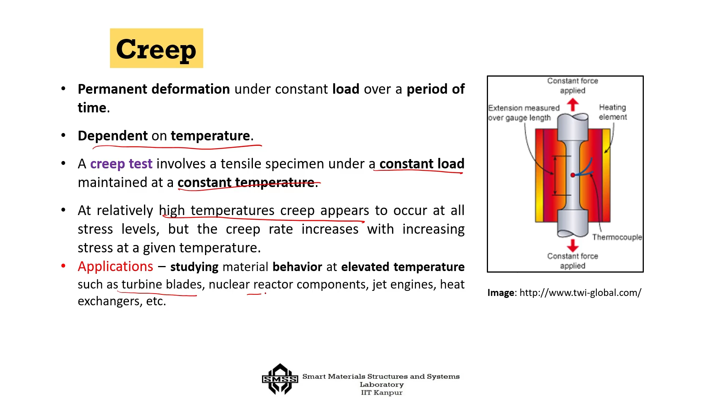Now, looking into how this creeping happens, you will see it has three stages: primary, secondary and tertiary. The primary stage is where the instantaneous deformation happens -- you apply the load, you see the instantaneous deformation. After that, the deformation remains almost steady, not increasing much, until the secondary phase. And finally, you get the tertiary phase where the deformation suddenly increases at a very high rate.

So at temperature less than 0.4 of the melting point temperature, after the initial deformation, the strain is virtually independent of time. With either increase in stress or temperature, creep strain is going to increase. So as time changes, with application of the same load, this creeping happens and eventually ends in rupture. On the other hand, as temperature increases, against the same load, failure happens pretty fast. But below 0.4 of the melting point temperature, close to melting point, it is not going to creep at all.

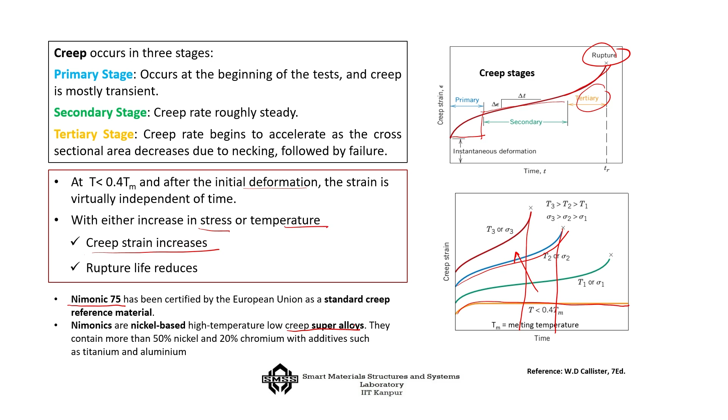We use a comparable material called Nimonic 75 as a standard creep reference material. With respect to Nimonic, which is a nickel-based high temperature superalloy that has low creep, we can measure what is the creep in our system.

Next is damping. As I told you, from the vibration point of view, damping is enormously important. The way we actually reduce vibration is either by increasing the damping capacity, or if it is at a very low frequency level, by increasing the stiffness, or by changing the mass if it is at a very high frequency level. Damping refers essentially to the dissipation of energy from a vibrating system, and the damping force magnitude is generally smaller than elastic and inertia forces.

Even if damping force is smaller, it has an important role in terms of controlling the vibration, because even if the force is smaller, repeatedly the energy is getting drained, and that actually makes the shape exponential in nature. This we have to definitely consider for applications where shock absorption is important, fatigue failure needs to be prevented, or noise needs to be reduced.

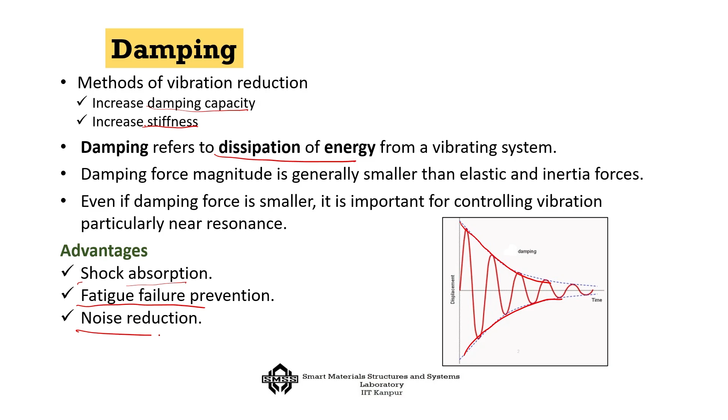Now there are different types of damping systems. One of them is called viscous damping, typically represented by a dashpot system, which shows a piston moving relative to a cylinder containing a fluid. Such damping force is proportional to the velocity, C times x dot.

Now what we are going to assume for this viscous damping case is that the relative velocity is low and there is laminar flow happening in the system. This is typically a viscous damper which is used for earthquake prevention, for seismic protection against the earthquake.

So that is the viscous damping system. What kind of material do we use? Well, some viscous fluids like silicone, silicone oil, can be used in terms of damping or dissipating the energy of the system.

Then there is another type of damping possibility, because of the rubbing of two surfaces. We call it Coulomb damping, which is dry friction force between two solid interfaces. In this case, the magnitude of the damping force is assumed constant, that is, independent of the relative velocity at the interface, but it has a direction which is always opposing the slip velocity.

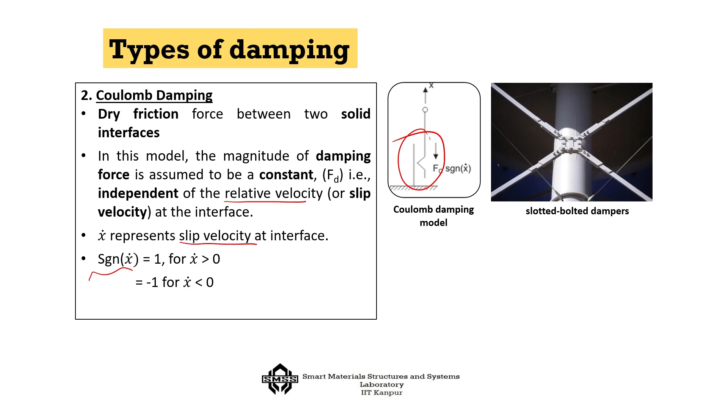So the sgn of x dot, the signum function, we call it: equals 1 for positive velocity, equals -1 for negative velocity. So it reverses direction depending on the direction of the relative velocity of the two systems. That is Coulomb damping.

The next important point we have to keep in mind related to damping is the damping ratio. Earlier we said that Fd is C times x dot, but that is not good enough. We should always see what is the nature of the damping.

So let us say we are trying to measure the response of a system. Now, if the response is exponentially coming down with oscillation, this will be an under damped system. For a critically damped system, this will simply come down without any oscillation. And if the damping is more, the same thing will happen without any oscillation, but may take a little more time.

That is the over damped system. Now, we always measure the damping with reference to the critically damped system. So Cc is the critical damping, and that is generally defined as 2 times the square root of Km. So what is the square root of Km?

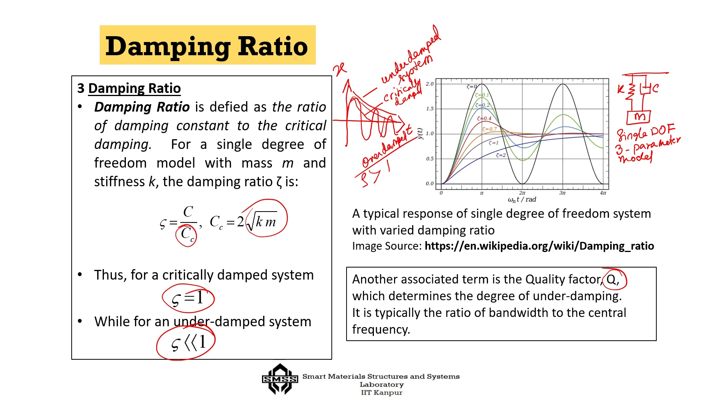Now, the loss factor, which is an important element, tells us how much energy is dissipated during vibration, and the ratio of that with respect to how much energy is stored into the system in every oscillation. So the loss factor essentially tells us, suppose if the loss factor is 0, then the entire energy is stored, hence there is no energy dissipation. So this is 0 loss factor.

Let us say time versus amplitude of motion. Let us give it a parameter like x. This is 0 loss factor. Now, if at each and every cycle we see that the amplitude comes down, that means that part of the energy is getting lost in dissipation. So then the loss factor, there is some finite loss factor there.

This loss factor is defined and related with respect to zeta, the damping ratio, following this relationship, and also the loss factor and the damping ratio are related to the quality factor. For example, zeta equals 1 by 2Q. In other words, this tells us that Q equals 1 by 2 zeta. That is the Q factor, the reciprocal of 1 over 2 times zeta.

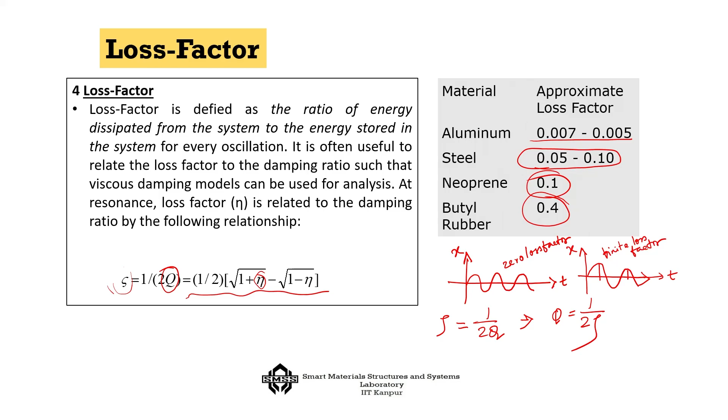That is important because that itself can be a good source of damping, and hence you do not have to put an additional source of damping. For example, to prevent earthquake damage you give an additional source of damping, but if the structure itself can prevent it, that is the best.

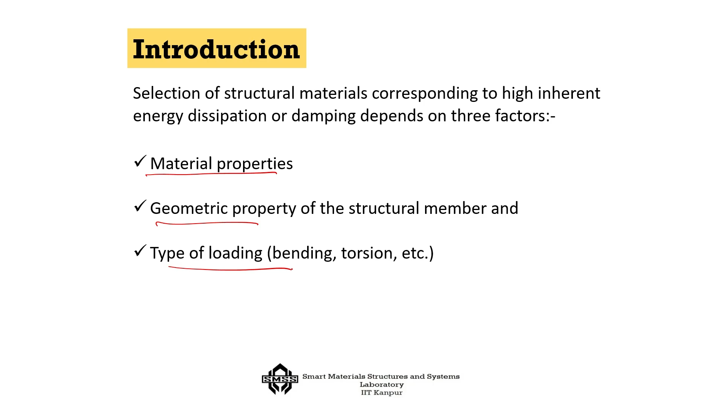So we are looking at energy dissipation in structural materials. If you have to look into it, you have to consider the material properties, the geometric property, and the loading. Of course, all three of them are important in terms of how much damping is going to happen.

We all know that for a single degree of freedom system, inertia, that is the mass part, plays an important role, and then stiffness plays an important role, and then we look into the damping. Stiffness is imparted through the Young's modulus and shear modulus as far as structural damping is concerned, and inertia is imparted by the density and cross section of the system.

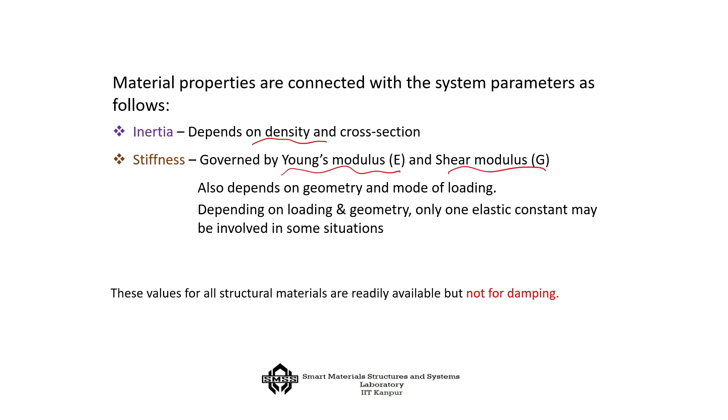Now let us look into the damping. What are the possible ways in which the structure can dissipate energy? One of them is called the Snoek effect, named after its discoverer, a Dutchman, Jakob Louis Snoek.

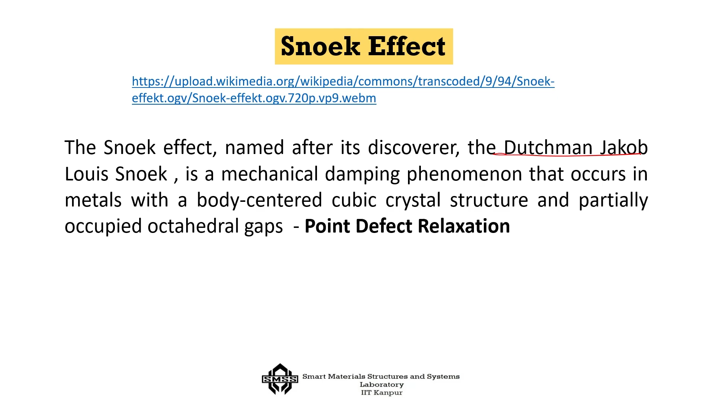It is a mechanical damping phenomenon that occurs in metals with a body-centered cubic crystal structure and partially occupied octahedral gaps, and this is a point defect relaxation. This happens, for example, in carbonaceous alpha iron systems, in which the carbon atoms are dissolved in the octahedral gaps of the iron lattice. There you see damping happening because of the point defects in the crystal due to the relaxation of these defects, and this is known as the Snoek effect.

The Q factor for it is roughly 100, so Q inverse is 1 over 100, and I already defined the Q factor. In fact, there is an interesting relationship between tan delta, or the loss factor eta, and the Q factor. Eta is tan delta. This relationship we will derive later on, and that is the reciprocal of the Q factor.

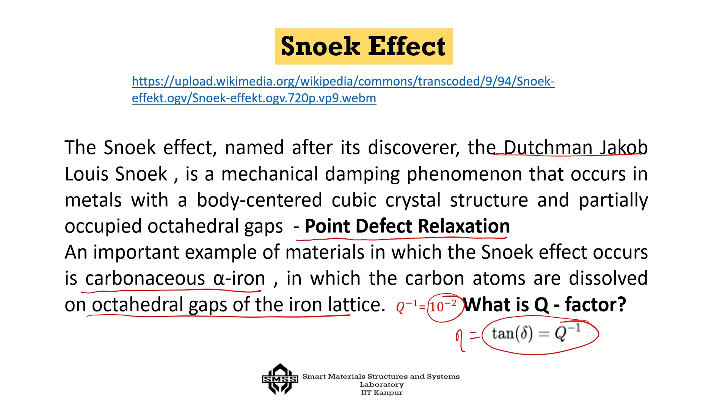Damping capacity of structural material may also depend on various internal mechanisms. For example, one of them is the thermoelastic effect. If the material is initially unstressed, a homogeneous stress field will produce no loss, but if it contains some thermal related stresses,

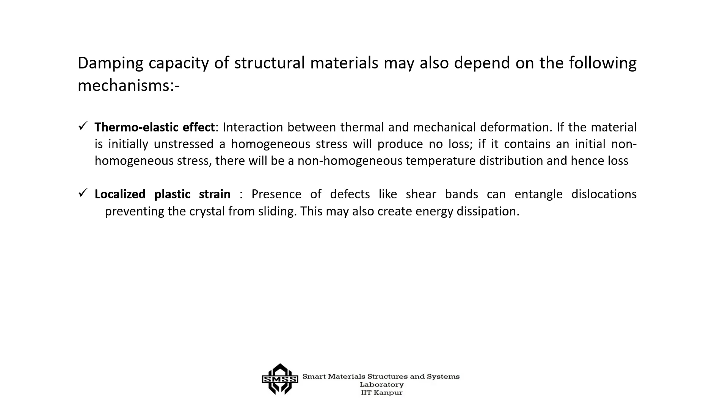then the non-homogeneous stress distribution will cause this loss. Another possibility is localized plastic strain, present at defects like shear bands that can entangle dislocations, particularly for polymers. So the localized plastic strain can create energy dissipation. For metals, structural damping can happen because of grain boundary slip also, that is, movement of one grain over the other.

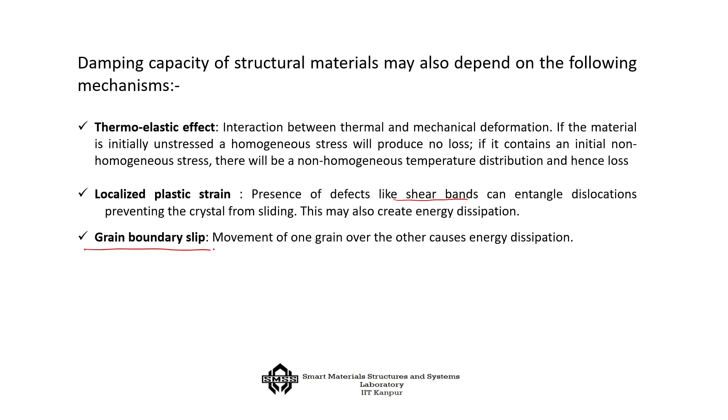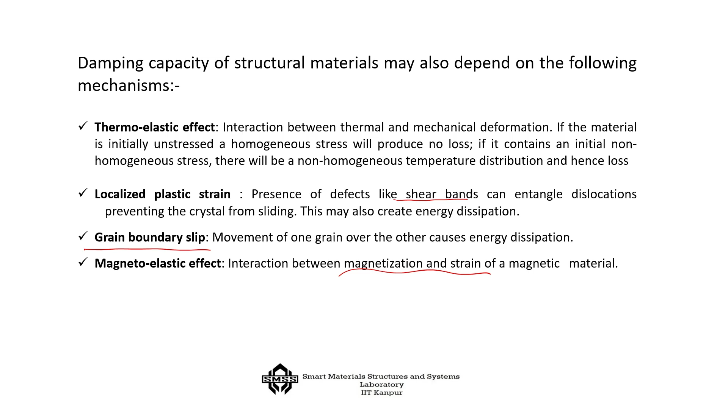Then there are sometimes materials like ferromagnetic materials where there is a magnetoelastic coupling, an interaction between magnetization and strain. Let us say the structure is in a magnetic field. There are domains which are already magnetized, and as it vibrates, magnetic particles move against each other, which also creates damping in the system. That is the magnetoelastic damping. So there are all these possibilities which can generate structural damping in a system.

Now, one important thing is that stress plays a very important role in structural damping. Under harmonic loading and low stress level, the energy dissipation can be given by this kind of hysteresis in the system. At low stress level, the area under the stress-strain curve is measured as dm, and that gives us the measure of energy that is dissipated.

Now, dm is actually related to the stress with two parameters, one is j and another is n. So j is called the damping constant and n is called the damping index. N is the damping index, which is usually 2 to 3 in the working stress range. This is an important way of defining the structural energy dissipation.

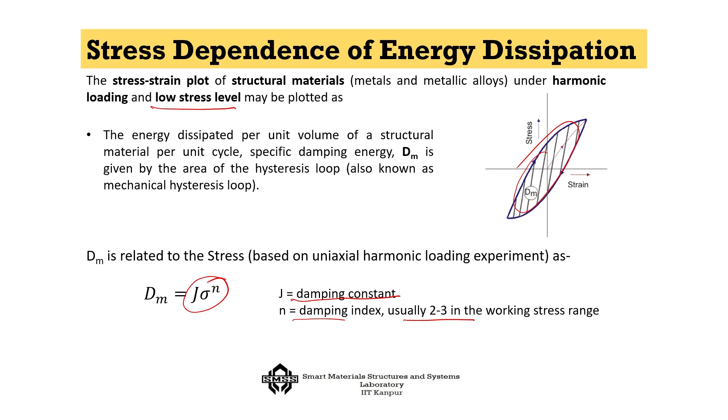Now, one important thing is that dm is independent of frequency. The structural damping hysteresis does not change with the excitation frequency. That is a very important point we have to keep in mind.

Now you can compare the viscous damping case, that is the energy dissipated in viscous damping, with the energy dissipated in the structural damping case. The energy dissipated in a viscous damping case can be written as pi c omega x square. So energy dissipation here increases linearly with frequency, and with the square of the amplitude. That is the energy that dissipates in a viscously damped system.

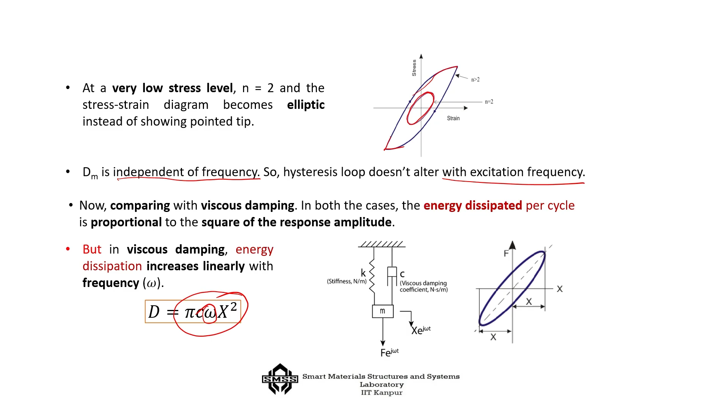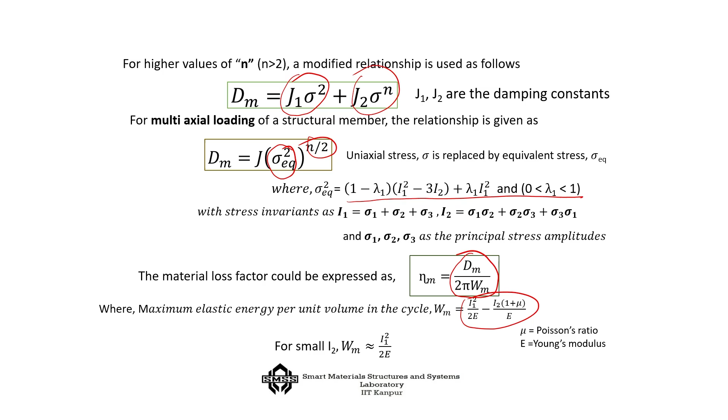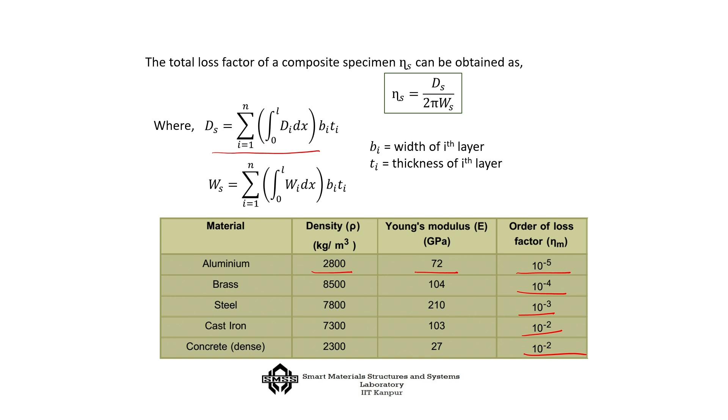Now, if you have a material like a composite, you have to find it out for each of the contributing materials and then sum it up. Now, if you compare a few common materials, their density, Young's modulus and the order of loss factor, you will see that aluminum has one of the least loss factors, followed by brass, followed by steel, cast iron and concrete. Cast iron and concrete have much higher loss factor, meaning they will dissipate more energy.

Now we will come to one mathematical case, where I will show you how we can select material for a linear hysteretic damping case.

For linear hysteretic damping, we assume the energy dissipated is proportional to the square of the amplitude of motion. So alpha x square is the hysteretic damping, and let us compare that with the viscous damping, which is always pi c omega x square, to find the equivalent damping constant.

If I equate the two, pi c equivalent omega x square equals alpha x square, the x square cancels, and C equivalent becomes alpha by pi omega. If we denote alpha by pi as the hysteretic damping coefficient H, then C equivalent becomes H by omega.

Now you can also find the loss factor eta, which is the energy dissipated per cycle divided by the maximum energy stored in the system. That comes out as alpha by pi k, and since alpha by pi is H, it becomes H by k. So for a hysteretic material, eta equals H by k.

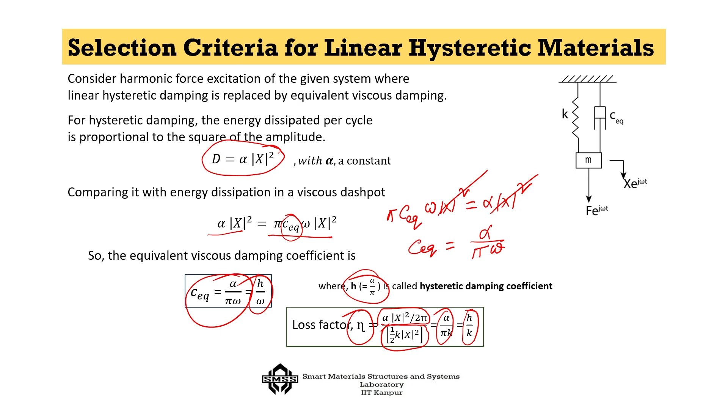Now consider a single degree of freedom system where we are trying to estimate the structural damping. Instead of C, I can write it as H by omega, since we just saw C equivalent is H by omega, and alpha by pi was H. So the governing equation becomes m x double dot plus H by omega x dot plus kx, which equals the applied force.

Now you apply x as amplitude x times e to the power i omega t, and in steady state try to find x. All the e to the power i omega t terms cancel, and you get an expression of x with respect to the applied force, stiffness, mass, etc.

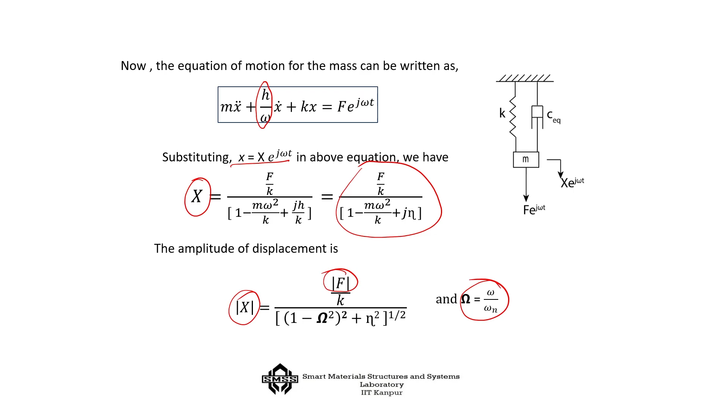If you find the amplitude of x, it has the amplitude of force divided by stiffness, and with the help of a non-dimensional frequency parameter, the denominator becomes the square root of one minus omega square plus eta square. That is the amplitude of displacement.

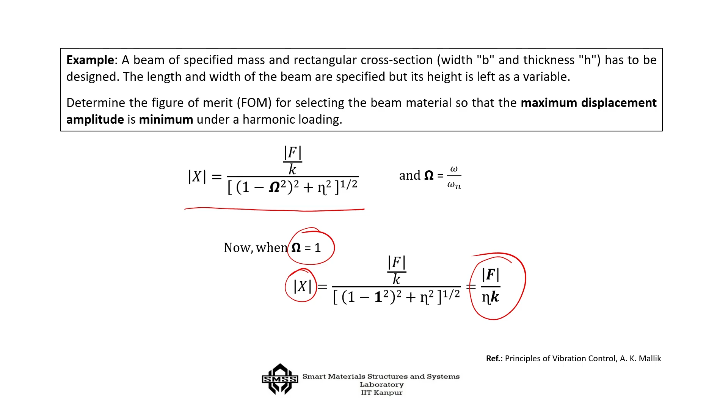Let us try to find the material selection criteria for such a case. We have x equals f by k over the square root of one minus omega square plus eta square. Let omega equal 1, that is maximum, for resonance. At resonance, x maximum will be related to f over eta k. Let's look at what material properties are involved inside f over eta k.

Suppose we consider a case where the width of a beam is given, then the stiffness will only change with the thickness. How does it change? It changes with the cube of the thickness. So K varies with E T cube, where T is the thickness of the beam and E is the Young's modulus.

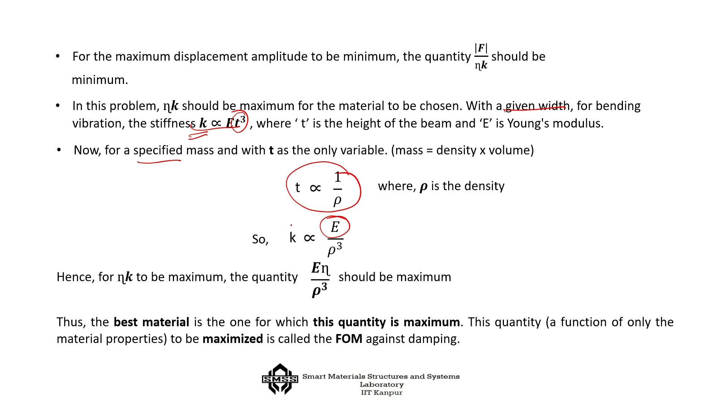For a given specified mass, thickness varies inversely with the density. So now this stiffness K will vary with modulus of elasticity proportionately, and inversely with rho cube. So whenever we see F over eta K, the material property involved there is E eta over rho cube.

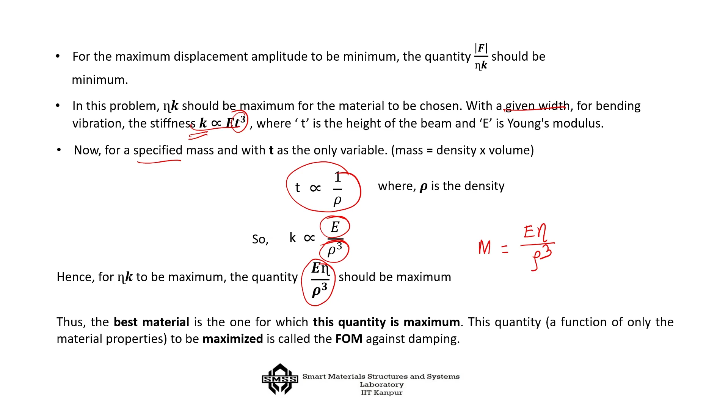So for structural damping, our material property index is E eta over rho cube. That is important for us for structural damping. Let us now look into what this value will be for steel, brass and aluminum.

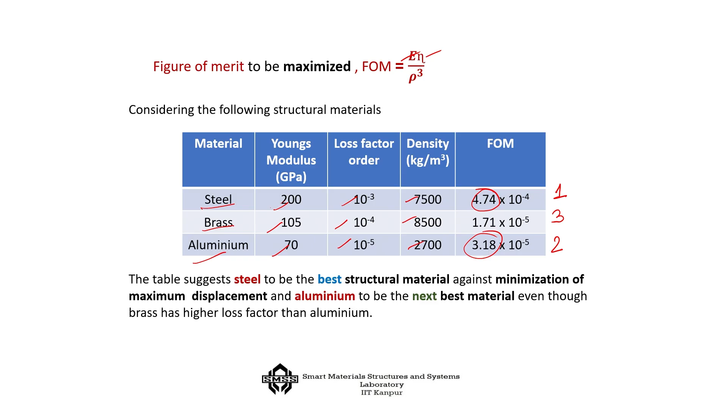So that is how the material property index often gives us a surprising result, because invariably this index shows the interplay of two or three different mechanical properties, and hence we get this interesting result in this case. Thank you, we will close here as far as structural damping is concerned.

In the next lecture, we will talk about the viscous damping or the viscoelastic damping part of a polymeric system. Thank you.